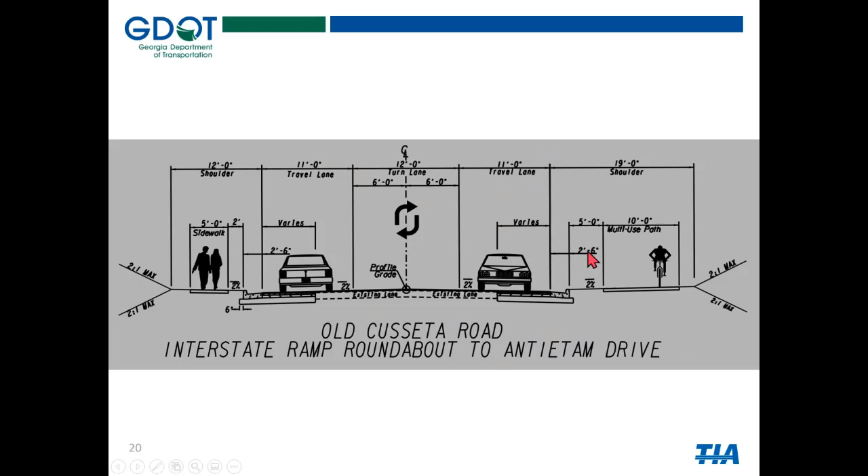The first comment I see coming in is related to the intersection at Old Cusseta Road and Cusseta Road. We have a question: has the left-hand turn lane on Old Cusseta Road been removed from the plan? If you could go back to the slide that shows that intersection, maybe we could go into more detail. The only turn lane that we're going to have here is a right turn slip lane, and that's because it's so tight with the angle between Cusseta Road on the east and Old Cusseta Road, so it's a single lane roundabout, so there won't be turn lanes here.

Right, but people will still be able to access from the roundabout Cusseta Road in either direction, correct? Well, it's the circulatory roadway handles all the left turns and the through movements through the roundabout. Right, so I think that was what the question was about, access. We'll confirm that we answered that question, but yes.

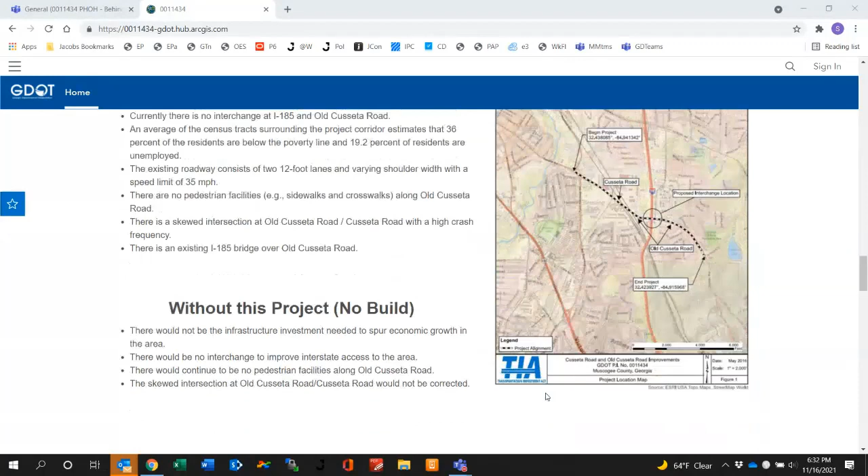We have a few more details here about the project description and some discussion, as we showed earlier, about if the project wasn't built. I also want to mention we had some frequently asked questions—these are questions that came up when we went out to the public previously.

We discussed through these drop-downs when the project will be built according to the current schedule. One question, when we were here in 2017 and through ongoing coordination, was how the project would impact the historic African-American neighborhood along the project corridor.

There's some discussion here about how the neighborhood's impacts were taken into consideration and how, as we designed the project, we developed it with the intent of mitigating impacts to residents in the neighborhood.

There's some discussion, of course, since everyone wants to know how access to their property will be maintained during construction. We discussed that here: property access will be maintained for all properties during construction.

And then coming back to this original question, which led me here: why are roundabouts proposed on the project? Rich provided some good information about that, but I also wanted to point out, if you want more information from the Georgia Department of Transportation about roundabouts—including some information on their use and tips for navigating one if you're unfamiliar with them—you can find that here.

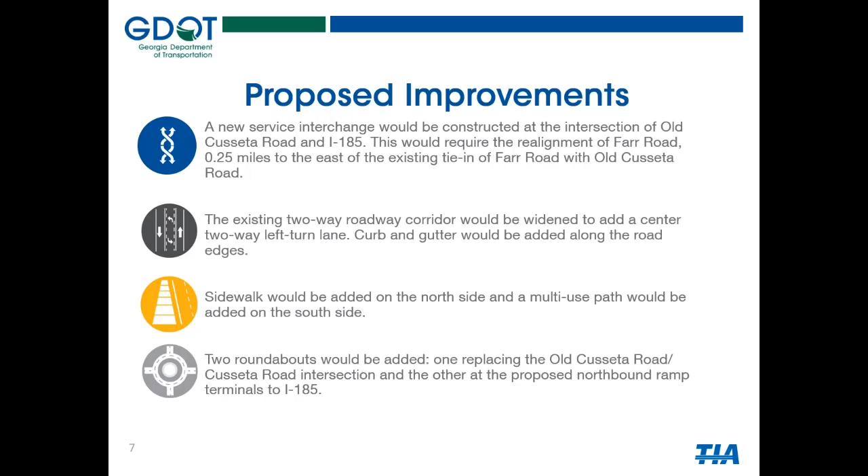The existing two-way roadway corridor would be widened for a center two-way left turn lane. Curb and gutter would also be added along the road edges. Sidewalk would be added on the north side and a multi-use path would be added to the south side. 2 roundabouts would be added, one replacing the Old Cusseta Road and Cusseta Road intersection, and the other at the proposed northbound ramp terminals to I-185. Next slide.

Without this project, there would be no infrastructure investment needed to spur economic growth in the area. There would be no interchange to improve interstate access to the area. There would be no pedestrian facilities along Old Cusseta Road, and the skewed intersection at Old Cusseta Road and Cusseta Road would not be corrected.

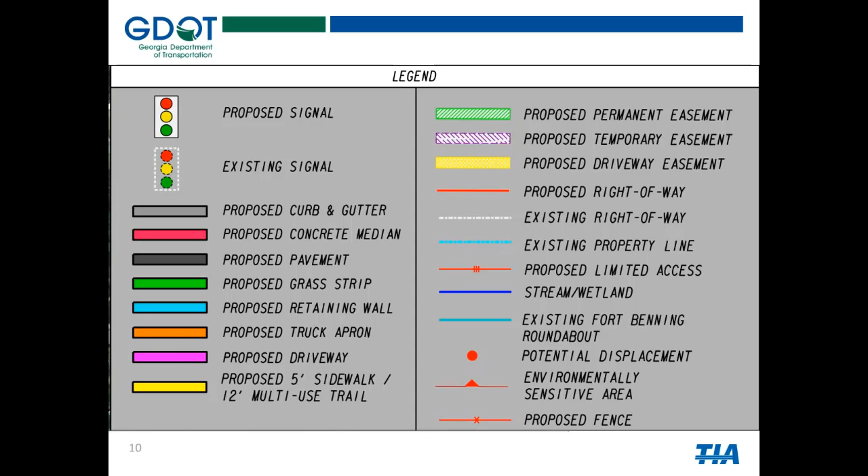So we'll be tying in and beginning our project just beyond that, and we'll tie in where we can connect to it with our typical section, which is basically a 3-lane roadway. It has one travel lane in each direction with a center turn lane.

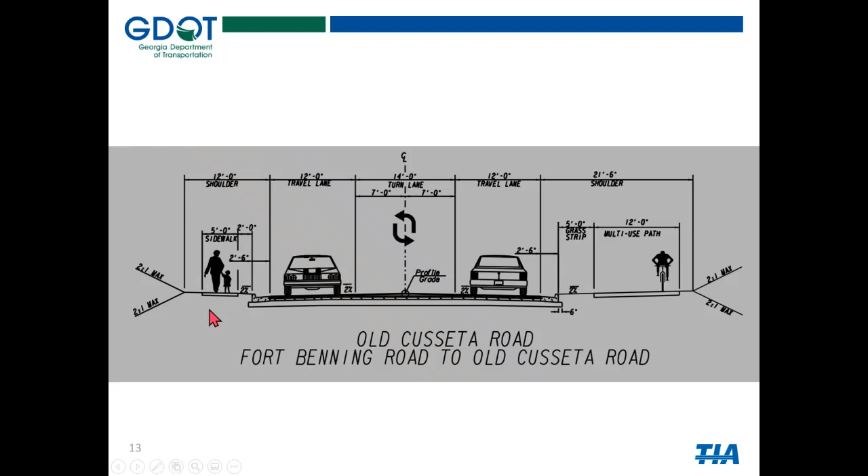As we continue through the project, we have the 3-lane section with the 2-way left turn lane in the center. The wider multi-use path along the south side runs along the whole corridor, and being on the south side, it provides access to the trail that was constructed on the old right-of-way of the railroad through here. This is a good feature for the area to help with multimodal considerations, where pedestrians and bicycles are served throughout the corridor.

As we move along, we're at the Old Cusseta Road intersection. That skewed intersection will be replaced with a single lane roundabout. Again, the multi-use path continues down along Cusseta and then continues on Old Cusseta Road. On the east leg of Cusseta Road, a 5-foot wide sidewalk will continue along the south side and connect to the existing sidewalk that's in front of where the school used to be.

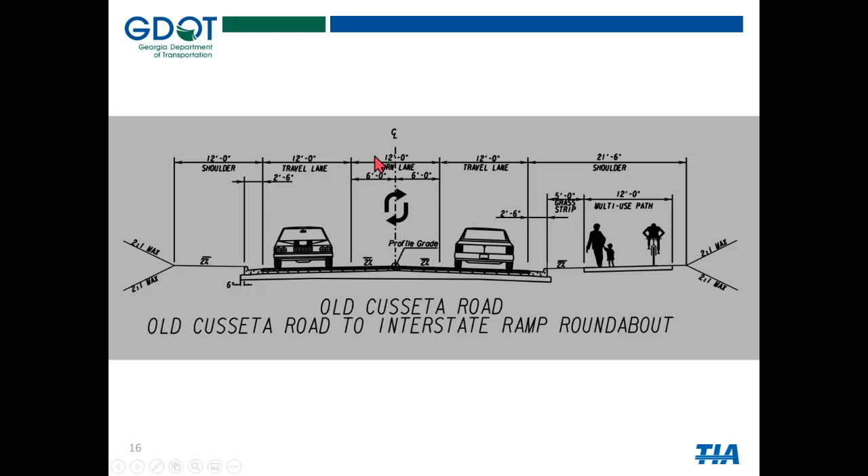This shows through that area. This is where we don't have sidewalk for this short stretch, and we still maintain the multi-use path on the other side. So we have crosswalks so people can get safely across at the roundabout and make use of the multi-use path. We're narrowing things up a little bit here - the center turn lane is 12 feet now with a 12-foot lane in each travel direction.

The one main feature of this project is we're going to provide a service interchange to provide access from Old Cusseta Road to I-185. This interchange is going to consist of diamond type diagonal ramps with roundabout control for access to and from northbound I-185, and for access to and from southbound 185, we'll have the exit ramp that comes here to the intersection, and the loop ramp that provides the entrance to southbound 185.

Farr Road, located here where the ramps will be, needs to be relocated, so we'll realign Farr Road to come around to the other side of the apartment complex and connect to Old Cusseta in a new location. That intersection is currently signalized, so a new traffic signal will be put in at the new location.

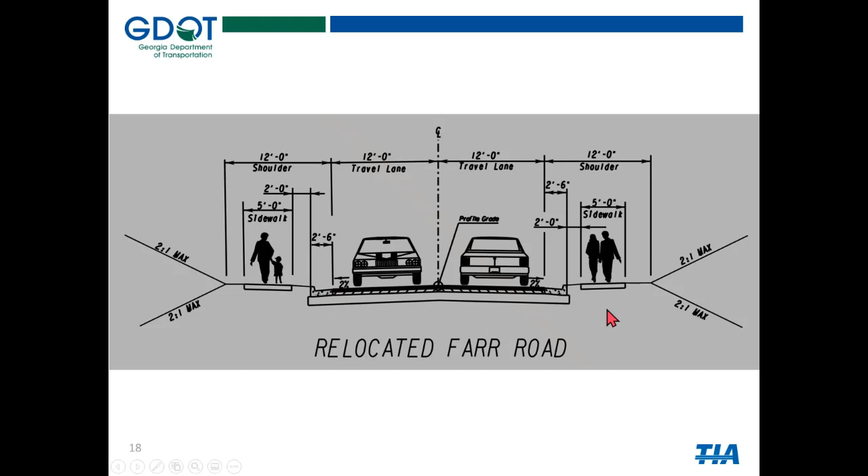Relocated Farr Road will consist of one travel lane in each direction. There'll be curb and gutter along the sides of the road, and it'll have a 5-foot sidewalk on both sides.

The two-way left turn lane continues to come through the area and serve the neighborhoods. We've got the historic districts of these neighborhoods, and we've designed it to minimize impacts as much as we can, so that we're not having to acquire or relocate any of the houses in these historic districts. We've got the Cedar Hills Historic District on the north and the Booker Washington Heights Historic District on the south.

Now the project continues down, and it'll tie in at Antietam Drive. This is where the roadway ends for the purposes of public travel - it's blocked off just beyond Antietam Drive.

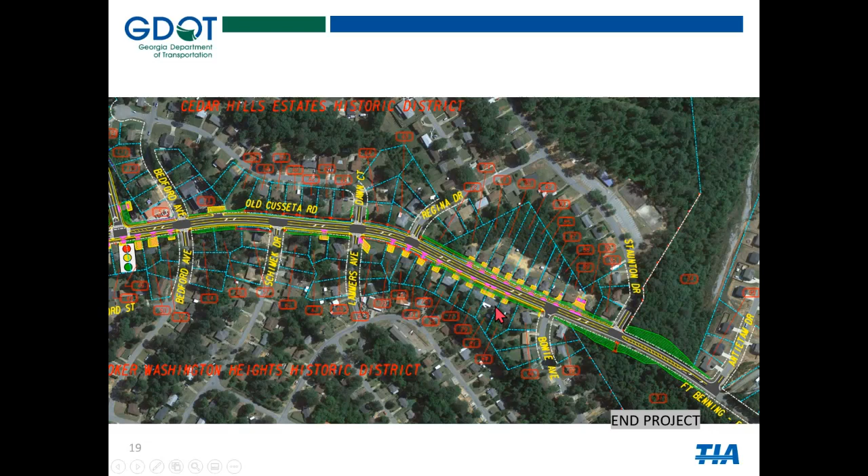So I'm sorry to interrupt you, Rich.

I wanted to ask if you could kind of mention how the roadway will accommodate 18-wheelers.

Okay, the roadway, our design vehicle is a WB67, which is the standard semi. So we've laid out the turning movements at the intersection so that the semi can make that turn.

The key areas where people are concerned a lot are the roundabouts, and I'll go back to that in a minute. Here we've narrowed the section to 11-foot lanes in each direction and a 12-foot turn lane, and we narrowed the path to a 10-foot path in this area to reduce the impacts to the houses.

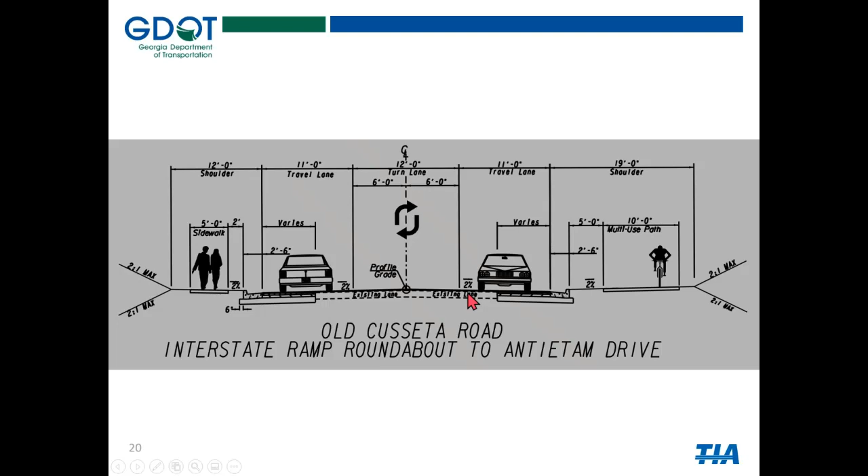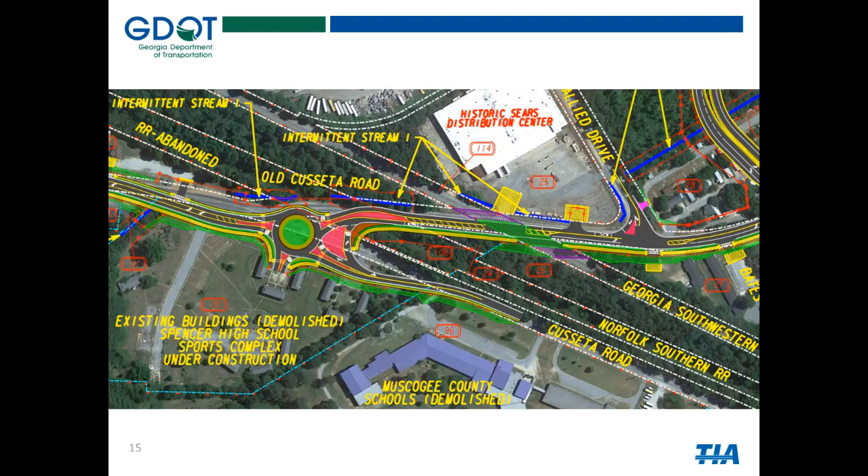William, do you have some information you can provide about the process for tenants? Yeah, I can do that - just give me one second. Sure, sorry to put you on the spot.

Renters who will be displaced during this project will be given a relocation package. That package includes 3 rental properties they can choose from, or they can find their own place to rent. The package will tell them what their moving payment is and whether they qualify for a lump sum rental payment. Each package will depend on the renter's living situation.

That's great, so that'll be part of the ongoing process we've discussed. Thank you.

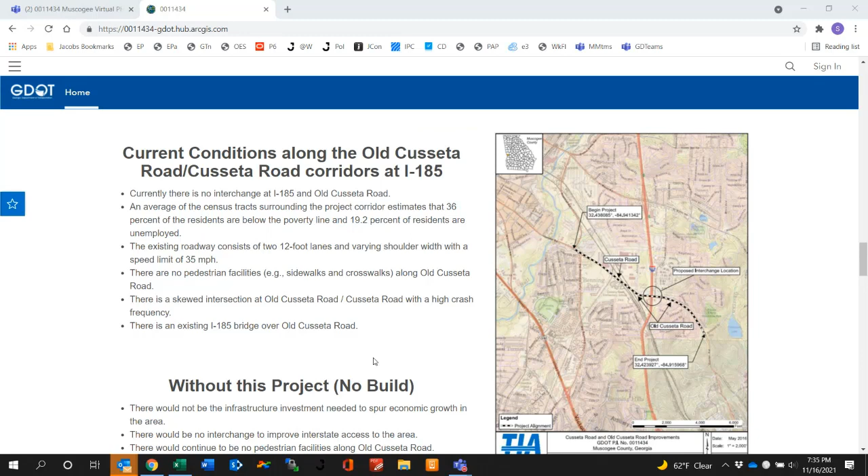We come again to more project description information here, and another link to the concept layout. This link here is the same as the one above. And another map with some more details about the project. Some of these we've already seen in

William Easton's presentation, part of the presentation. We also have frequently asked questions here, and these questions include how the project will impact the neighborhood, and Rich has talked a little bit about the way we wanted to ensure considerations of the neighborhood were taken into the development of the project.

We've covered how properties and access to properties will be maintained during construction of the project. We provided summary information about why we proposed using a roundabout for the project, and we have a link to more information about roundabouts and their use in the state. Another summary description about how the project is being funded, and a link for more information about the Transportation Investment Act program is available here.

Some summary of the environmental assessment is provided here, and another description and overview of right-of-way, including a link to our right-of-way pamphlet, which we linked to earlier.

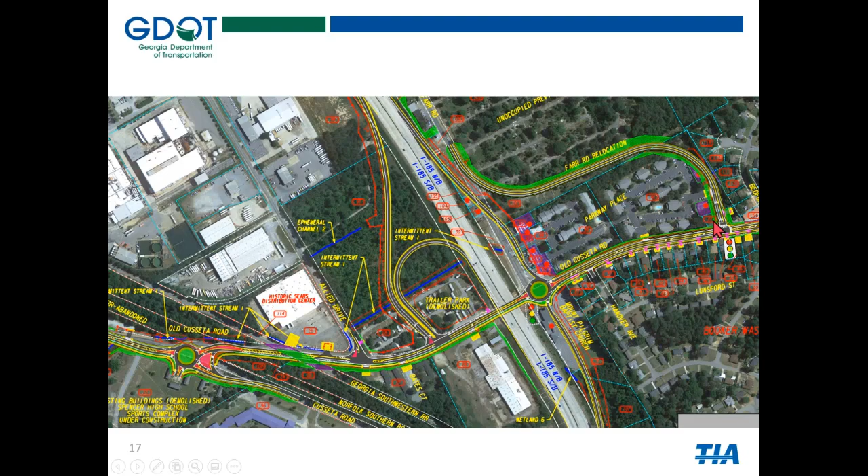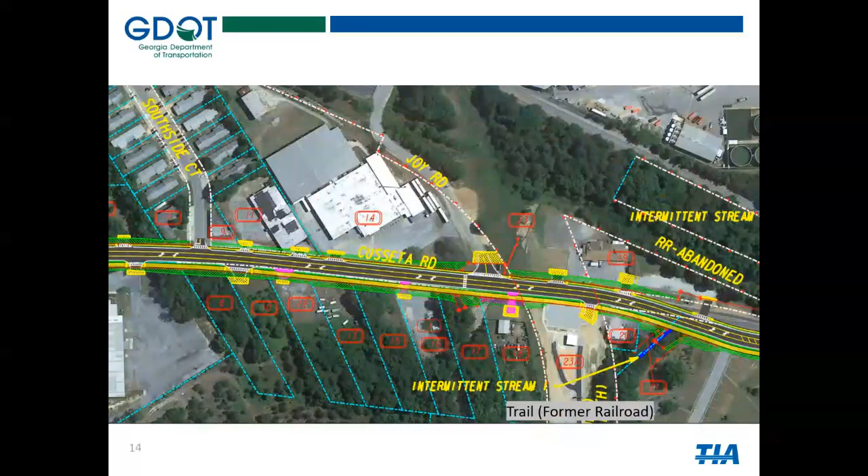The single family homes that were impacted - this property right here was one that was occupied, and these two were vacant, but they're small houses built very close to the road. So these properties were being purchased, and just widening the road put it right up into or right against those houses. So those are the three residential properties.

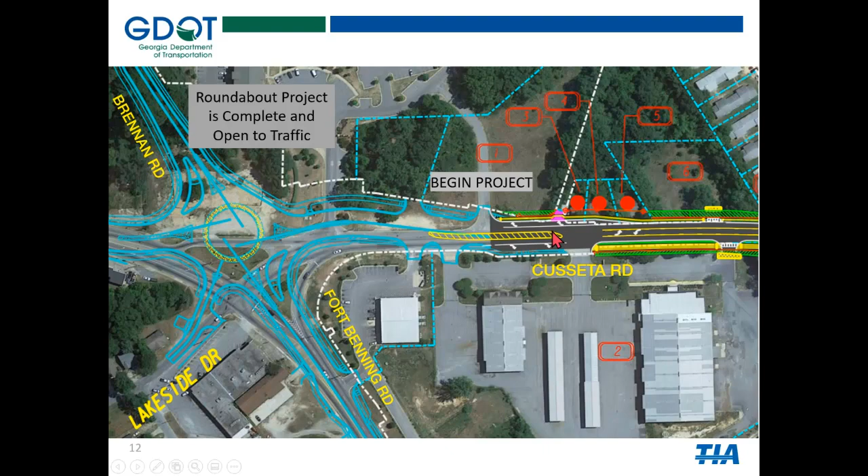That's good. Thank you, Rich.

And I do want to note - we're going to be compiling the comments and questions that we've received during this presentation. If anybody would like to ensure they receive a compilation of the comments and questions in a letter, could you provide in the chat your name and email? These will remain private, but we'll use this to send you a compilation of the comments, questions, and our responses that we received through this meeting.